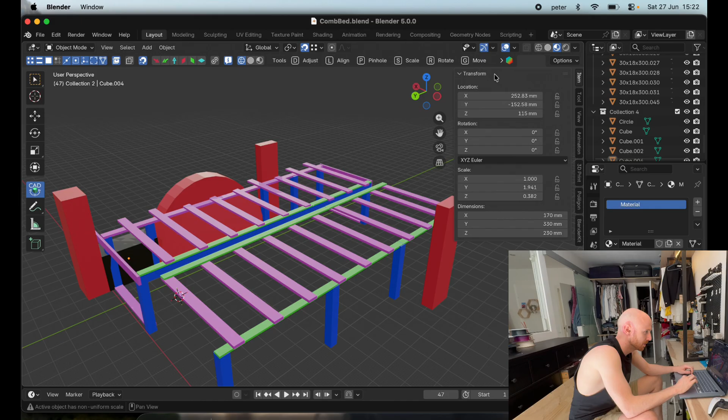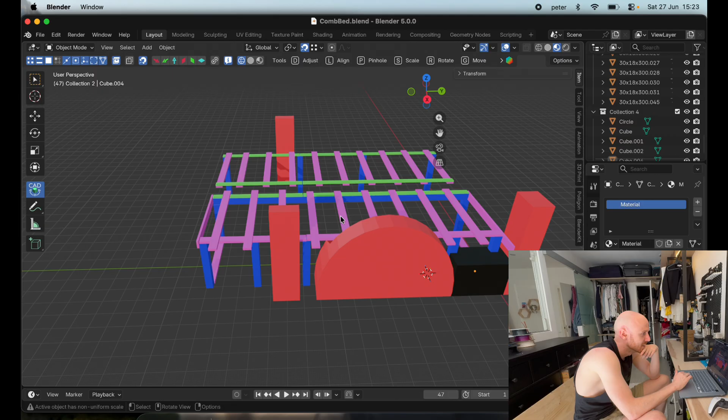I'll just go through some bits. So the colours, while they look airy-fairy, actually mean something. In red we have the parts of the van that currently exist that I cannot move, so I have to build around them - we've got the 2 pillars here. The rear of the van is on this side, and the front seats are here. And then we've got the battery, which is currently sitting here.

I'm going to have to cut the pieces to the measurements. With Blender, one of the great things is I can go into this transform menu and see the exact dimensions. So 44 by 44 are my 3-meter poles, and I'm going to need to cut them 1 to 292.

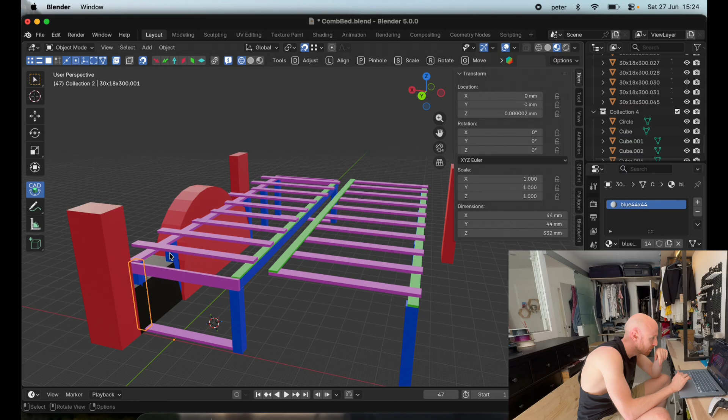These ones are a bit longer, so 332, 332. All these will be 332, 336, 332. I'm going to cut them all down to that size using the jigsaw, which we learned the other day.

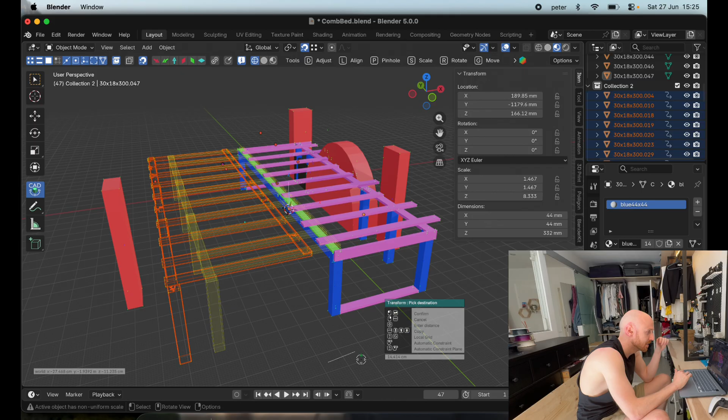Part of this bed design is that I have - let's go and select collection 2. Part of the bed, in the van, we need to be able to move. This is going to be a sofa most of the time, and then a bed at night. One of the things is this is going to come in and it's going to go here. So during the day it's a kind of bench, and then we can fold out and this will sit on top of here. That's the plan.

So this is the design. Now we need to get cutting the wood.

Those sizes of wood are what I found on a supplier here in Barcelona called Leroy Merlin. It's a bit like the B&Q of the UK. I measured all of the lengths of everything I would need. So here we've got the 44 by 44, and I've got all of the different lengths I need. And then I've got the 30 by 18, which is the thin one, all of the lengths I need.

Then I get total meters of the blue one - if we remember, the blue ones are these beams. And if I have the total meters, I have 5.4. Now they sell them in packs of 3 meters, so I can do a calculation based on how many meters I need, 5.4, and how many you get per 6 meters. So the total amount of the 3x3 units is 2, and the total number of that unit I need to purchase is 1.

Now, I forgot to mention, we take safety very seriously on this channel. So now I've got my eye protection, head protection, ear protection. I'm gonna put a hazmat suit on as well. Obviously, very dangerous to cut wood. So with these safety measures, I want to be keeping you safe. Very important to stay safe.

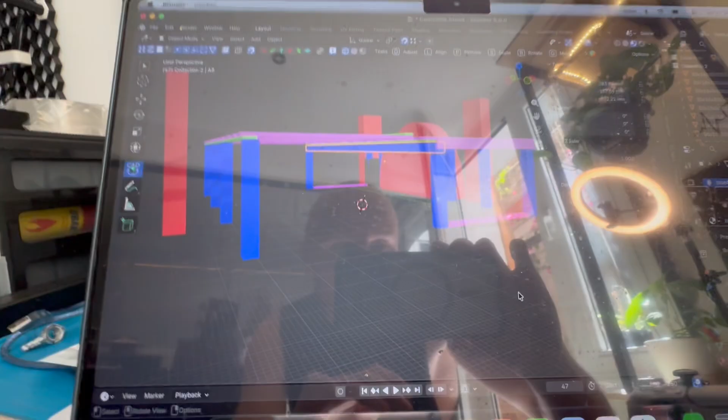Right, so we are ready to cut our first piece. We're going to go with the biggest one first because it's actually quite hard to maneuver. That's the bit that's highlighted in the center here. This is what we're going to cut first, which is, if we look over there...

1786 millimeters. So we've got our big 3-meter piece out here, which is quite awkward right now, and I can't put it on my desk properly. So we're going to cut the 1786, and then we should have some shorter piece to then make the other parts out of. Let's see how that goes.

As always, we need to measure twice, cut once. That's the golden rule I remember from school. So we've got our big pillar here, which is a bit beefy, and we've got 1786, so we've marked it there, and now we're going to perform the cut. Let's get on with that.

If you remember from my last video, you normally want a jig to cut in a straight line, but it would be very hard to attach a jig to this. So I'm just going to draw the line and then follow it with the saw. At the end of the day, this is so short that I don't think adding a jig... I'm not even sure how I would add a jig. Perhaps I could attach this. You know what? Change of plan, we are going to add a jig. I now have proper clamps.

Open that, put that, it's loosely on. Now we just need to measure how far this gap is, let me make that clear. So the gap is from here to there, because that's the line we're going to follow. There we are, lined up nicely. Now we just need to stick this on.

Let me grab you so you can see what we've done. The point of this was so you see these lines now. When I push this up against the left side, our drill bit, which is right in the center there, should follow perfectly down the line we want to cut. That's the theory anyway, let's give it a go.

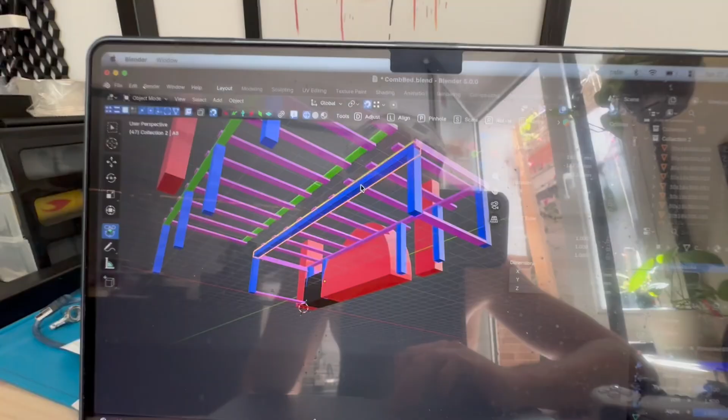So now we're gonna have to do some maths because I didn't really think about this, but we get a 3 meter length and I don't have loads of spare. So when I've just cut out this big 1786 part, I then need to cut out these parts, but obviously I only have 3 minus 1786 left. So what I'm trying to say is I need to maximize the number of bits I can get, because I'm always going to be left over with something, but I want to use as much of the wood as possible.

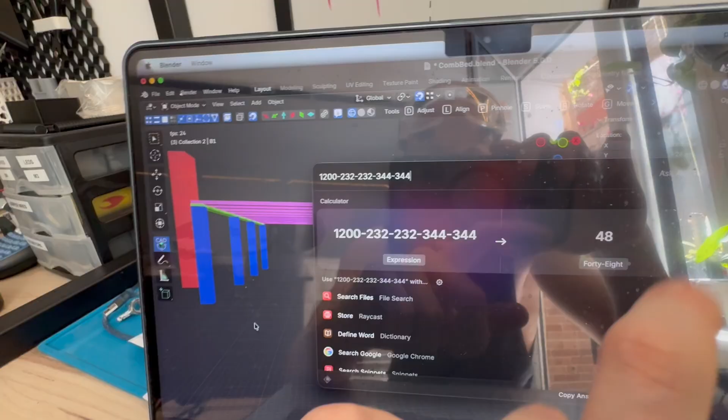Now we need to use this last part, which is the leftover, and we want to see how many bits we can get. Looks like maybe 3 could fit in here. Right, I've worked it out. We're going to do 2 of the 232s and 2 of the 344s, which are these. That will give us 48 left over, which is 5 centimeters, and that's enough to be optimal. So that should give us almost perfect usage of this 3 meter bar.

Right, I've made a decision here to clamp the thing to the bit that's going to fall off. I'm not sure whether that's a good decision because this whole thing's going to fall off, but jigging it on the other side would have been weird. Let's see. Goggles on.

Yeah, I'm really not liking the finish of these cuts. They're pretty untidy, I don't know if that's normal. I'm now going to speak to AI and see if that's what's supposed to happen. Probably normal, but let's see.

Right, we spoke with AI, and it says it does make some good points. One thing I can do is put some painter's tape, some masking tape, over that end bit that's going to be cut, and it should keep it tight. I should also bind both sides. In this case, I had this hanging over here with no support, and it says that's a terrible idea. So I need to support both sides.

So we might be going back to the chair system, and I could clamp to the chairs. I've had a bit of an idea of how to make this better. Throughout this project, I need to cut a shitload of wood, and I'm gonna have this problem over and over again. So I think if I cut a cutout here, I can always clamp on this side and then cut using the jigsaw through that gap, making this table properly a woodworking table.